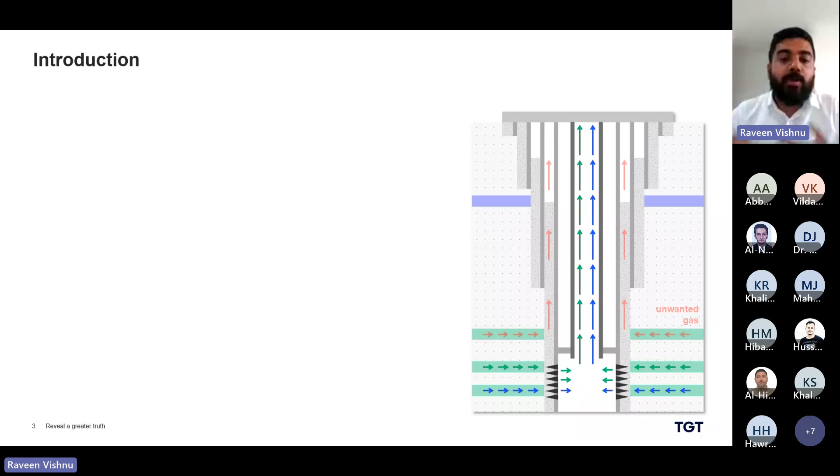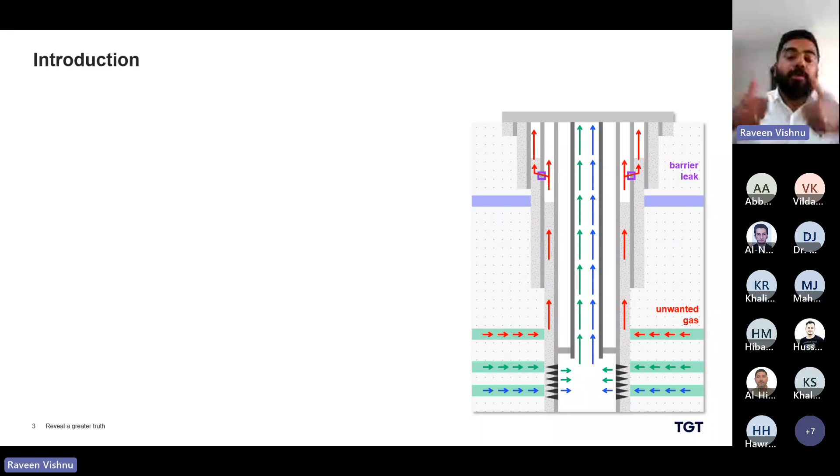Sometimes the seal, which is the cement in this case, is not sealing properly and is leaking, and the unwanted gas flows through the poor cement and goes all the way, which creates a sustained casing pressure at the surface. Another problem that can happen is this continuous flow creates a metal loss, which will lead into a hole and create a barrier leak.

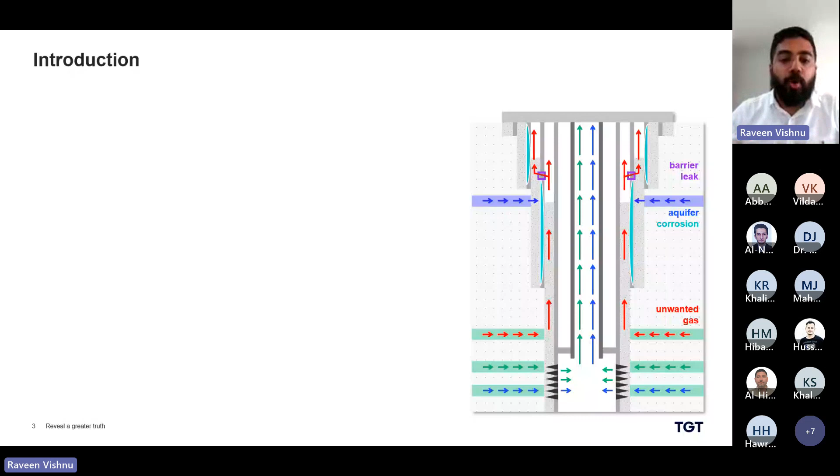Now, aquifers, which are usually in the shallow layers or probably even near the perforations, have corrosive properties, and this creates corrosion in the metal. So because of this unwanted migration, and the life of the well, the metal gets corroded, and this is what we are assessing using tube integrity.

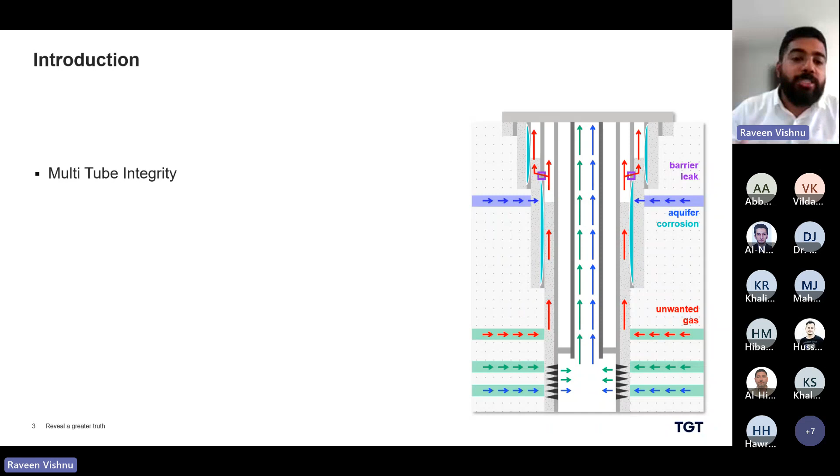This is why we need to do multi-tube integrity, to identify not just the condition of the first barrier, but the second, third barrier, and probably beyond as well. What Pulse, the electromagnetic tool of TGT, provides is individual barrier-by-barrier assessment of multiple tubulars, up to 4 tubulars. The advantage of the technology is that compared to conventional techniques like multi-finger caliper...

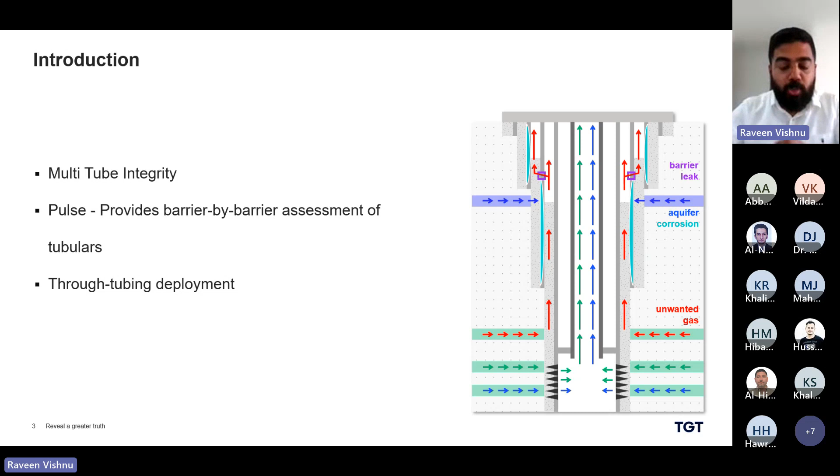If you have to assess the condition of tubing, you run the tool and assess the internal condition of the tubular. If you have to assess the casing, the first casing, you have to literally pull out the tubing to assess the condition of the second barrier, and even then you only assess the internal diameter.

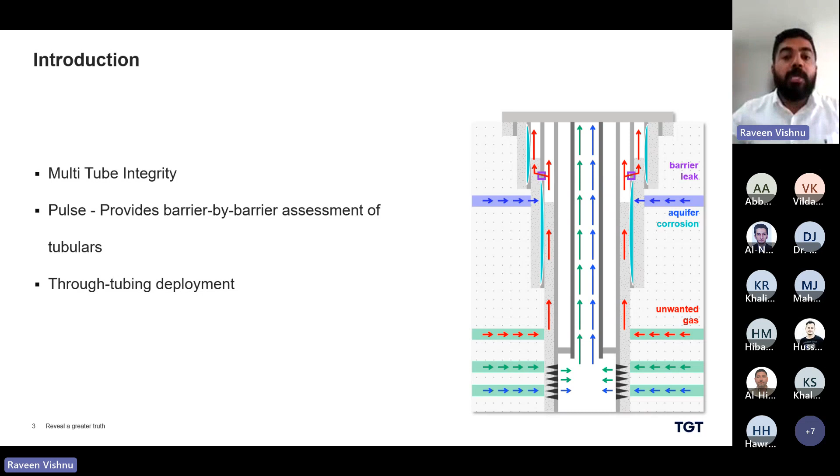The advantage of the electromagnetic pulse technology is that you can deploy the tool through the tubing, and you can assess the condition of not just the tubular but multiple casings beyond. There are multiple added advantages. It's not just the internal diameter you're assessing—since the electromagnetic technology is capable of identifying the condition of the outside wall, you can assess if there is any external metal loss as well. So these are the advantages.

Let me take you through the working principle of the tool. I'm taking Pulse 3 as an example here to explain the theory part. Pulse 3 is the TGT technology which helps us identify the first, second, and third barrier. In Pulse 3, we have three sensors, so it is an active tool.

There are three sensors: a short sensor, a medium sensor, and a long sensor. The name of the sensor is derived from its length. The short sensor is 5 inches, the medium sensor is 13 inches, and the long sensor is 19 inches. Based on the length is the scanning radius of the tool. The short sensor mostly scans the first barrier, the medium sensor scans the first and second, and the long sensor scans the first, second, and third barrier.

Inside each sensor there is a generator and a receiving coil. The generating coil magnetizes the metal around it, and the receiver coil sees how the decay of this electromagnetic effect is; we assess the decay to identify the metal condition. Let me take you to the principle—let's look at a typical well scenario.

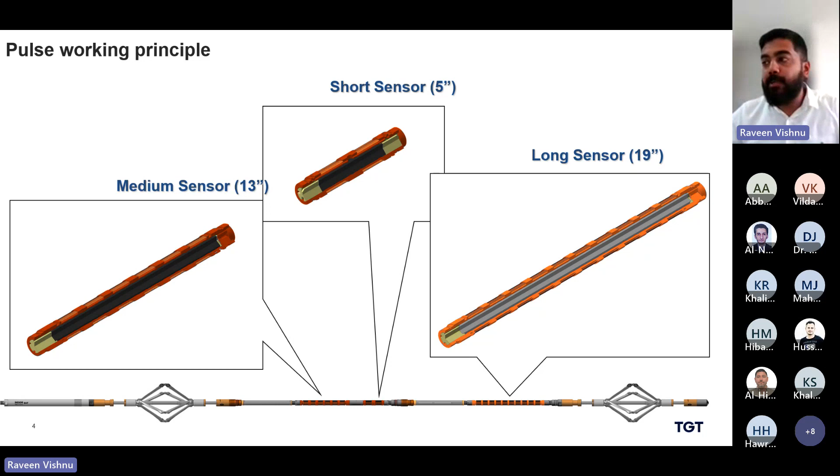We have the tool inside the well. Imagine this is the first barrier, this is the second barrier, and this is the third barrier. As seen before, there are three sensors: the short sensor scans the first tubing, the medium sensor scans the first and second casing, and the long sensor scans the first, second, and third barrier.

As I mentioned, we have a generator and receiving coil. The generator sends a square electromagnetic pulse, and the receiver sees how the decay is with respect to time for this electromagnetic current. What we do is record the data of the decay at multiple time points, and we analyze it.

Sorry, Raveen, sorry to interrupt you. Yes.

Can you change your network or something? Your voice is going back. Maybe if you're on Wi-Fi or 3G. I am on Wi-Fi. Maybe if I switch off my Wi-Fi and switch it on again, I'll be out of the meeting. So you want me to get out and come back? No problem. Let me switch off my Wi-Fi and come back.

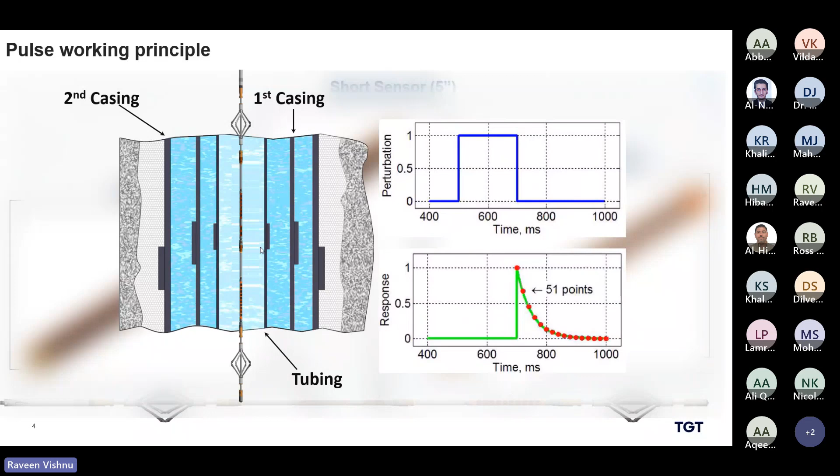As I was mentioning, there is a generator and receiver, and the receiver sees how the decay is with respect to time. You can see the plot here, and we take the data at multiple time points and analyze this data to see how the decay is. Let me show you one example of how the data looks like from one of the sensors, and explain how we can analyze this decay data to understand more about the condition of the metal.

So this, we use the time domain technique. Let me show you how the data looks like. On the y-axis we have amplitude, this is the energy, and this is the time. This is the electromagnetic decay response from the short sensor. If you remember, the short sensor scans the first barrier, right?

So how the data would look like for a thickness which is nominal without any change - this is how the typical data could look like for a situation where there is no change in metal. So this is like a baseline decay, right? If there is more metal, this is in the case of a collar, because across the collar there are two tubulars connected, meaning there is extra metal. The decay will be much slower compared to the nominal thickness. Why? Because now instead of a single nominal thickness, there is a double collar, a double metal thickness because of the collar, and this makes the decay become slower.

Now, what we are actually looking at in a well using tube integrity is the metal loss, right? And what would happen in the place of a metal loss? Across the metal loss, of course, there will be less metal, and this would lead to a faster decay, as you can see in the red line. So what we are looking at from the decay response is the faster decay, to understand that across this particular depth there is less metal. That's why we have a faster decay compared to a conventional decay. And this is the ultimate principle behind electromagnetic thickness detection.

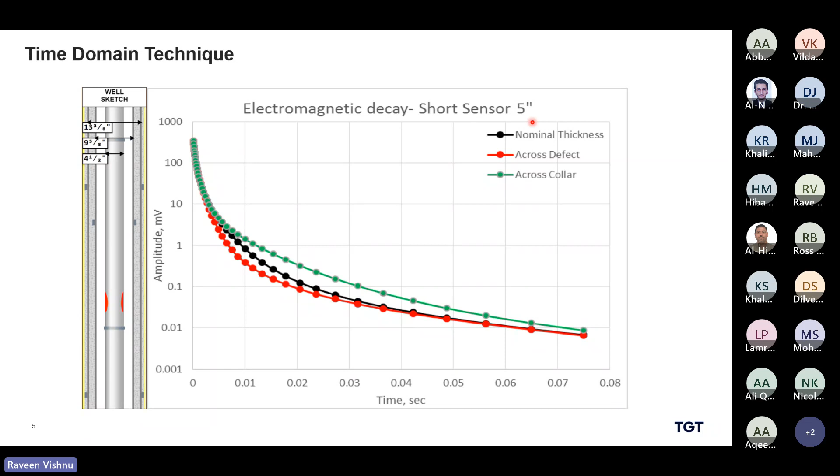Now for the medium sensor, you can see the major decay for the second barrier happens at a later time than the short sensor. It is this principle of the time domain technique that we use to identify the thickness of not just the first barrier, but the second, third barrier, and beyond that in some cases. So you can see that initially across the initial time there is no change, but across the second barrier you can see that across the defect there is a faster decay, and across the collar you can see a slower decay.

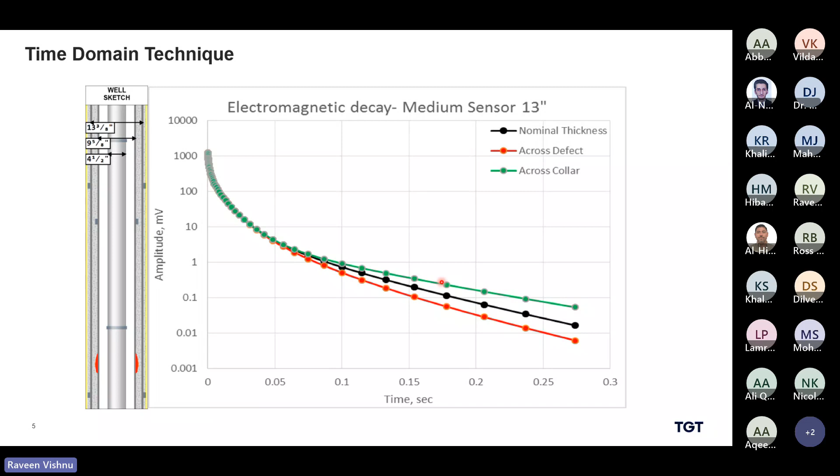Now, this is for the second barrier. Now across the third barrier, if you look at the time, you can see it's a much further later time than the medium sensor and the short sensor. We use this technique to identify the thickness of the third barrier, usually the 13-3/8 casing, right?

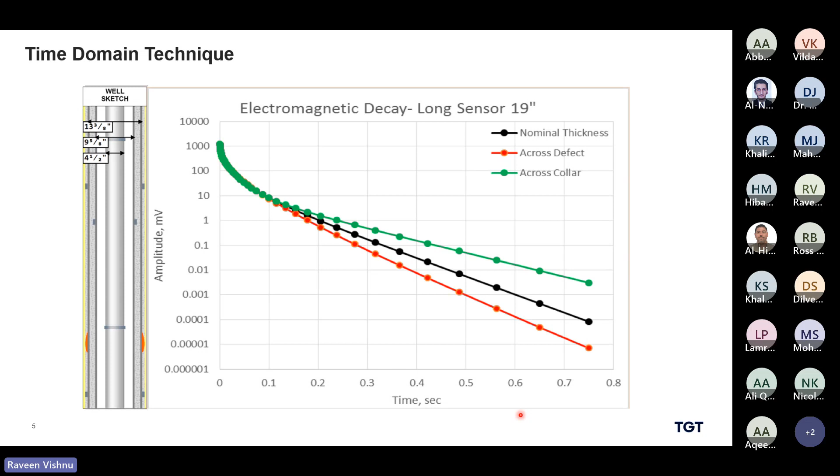So this is the working principle behind electromagnetic thickness detection. We use the electromagnetic decay to understand how much metal is there - if there is more metal, the decay will be slower, if there is less metal, the decay will be faster. And we use Maxwell's equation to convert this electromagnetic decay data into thickness. That's what we finally deliver to the customer.

So let's look at a raw data response, how it looks. This is data from multiple time points, and these three logs represent the data for this individual tubing size. For each tubing size, we have a template of which time channels would represent the decay, and we use that basis study to analyze that particular time channel for interpretation.

Basically, you can see this is the response, and you can see the slower decay across the collar, here. And across the corrosions, for example in this particular case for 9-5/8 casing, you can see a faster decay - this is the second place with the metal loss. This is a simple analysis with magnetic tools.

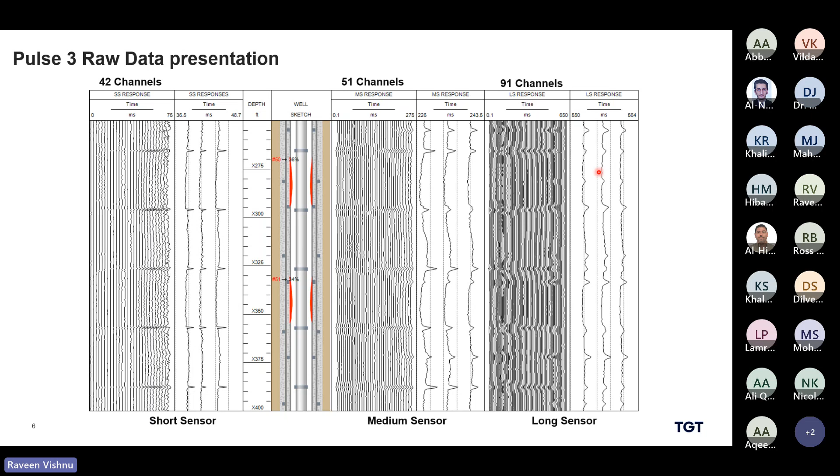So individually, we can analyze the first, second, and third barrier. There are some technologies which will give you a total thickness of multiple tubulars, and you are not able to differentiate where the metal losses are in the first, second, or third barrier. But with time domain technique, the beauty is that we can analyze the situation for the first, second, and third barrier individually. So that's the raw response.

And after solving Maxwell's equation, we can identify the thickness. As an end product, what we can deliver is a joint by joint analysis of the well for each individual barrier. So let me show you the summary table, how it looks like.

In the columns, we have the joint number, what's the top of the joint, the length of each joint, what's the nominal thickness provided, what's the minimum thickness, what's the average metal loss in that particular joint, what's the maximum metal loss, and at what depth the metal loss is maximum. So you can pinpoint for your workovers - okay, at this particular depth, I have the maximum metal loss, so during workover, if I'm going to put a patch or something, I have to care for this exact depth to put the patch.

After discussing with the client, we come up with a class of hazard, because the client knows more deeply about the kind of metal loss expected in the region. So we categorize the metal loss into multiple categories to come up with actionable, quick-look solutions for the client. Above 25%, mostly the clients recognize as a significant class of metal loss, and it's something to be taken care of.

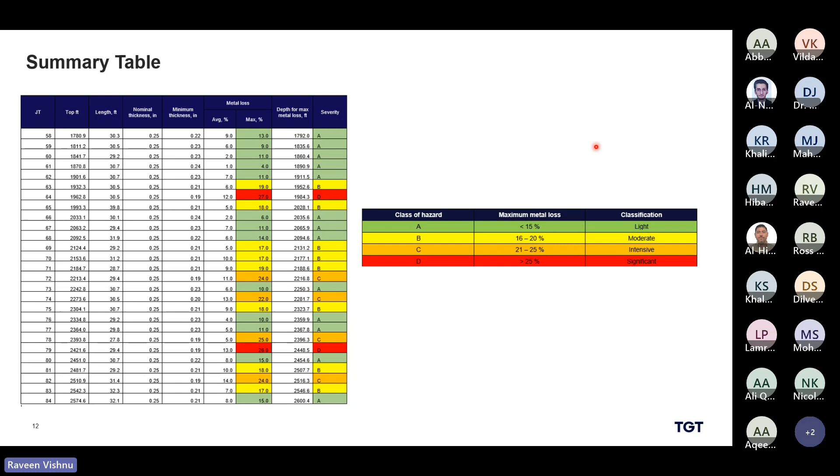So that's the final summary table that's provided. For each individual barrier, we can understand by a quick look which are the joints that have significant metal loss, which are the joints that have light metal loss, and so on.

So for Pulse 3, you can see a tabular column of the specifications of the tool. The maximum temperature rating is 150 degrees Celsius, and pressure rating is 14,500 psi. It has an H2S resistance of up to 30%. And we can identify the accuracy.

The accuracy is different for each barrier - the first barrier is plus or minus 3.5%, 6% for the second, and for the third barrier it's plus or minus 12%. Since the tool is very slim, only 1.65 inches, we can assess almost all tubulars and pass through almost all type restrictions. The conveyance can be done rigorously - slick line, wire line, coil tubing, tractor, and so on.

So these are the specifications of the tool, and we have the latest technology called Pulse 8. So what is the added advantage of Pulse 8? What was the length of this tool?

So it's approximately, I think it comes around 6 feet. If I'm not wrong, it's around 6 feet for Pulse 3. It depends on tool by tool, so it's approximately 6 feet, yeah.

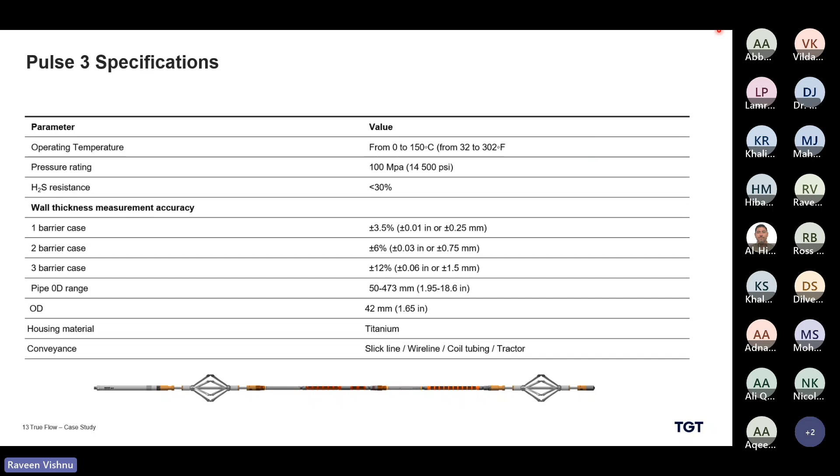Okay, thank you. Right, so we have the latest technology called Pulse 8. Pulse 8 gives you a sectoral understanding of the electromagnetic condition. Basically, Pulse 3 and other electromagnetic technologies give you a circumferential average of the metal loss, but Pulse 8 has 8 electromagnetic sensors throughout, and we can understand sectorally how the metal loss looks for the first barrier.

So it gives you sector-wise how the thickness would look like, and it helps us identify concentrated metal losses in one area of the tubing, or if it's evenly spread across. So it gives us a much clearer understanding about the condition of the well, a sense of how it looks in a 360-degree view of the first barrier condition.

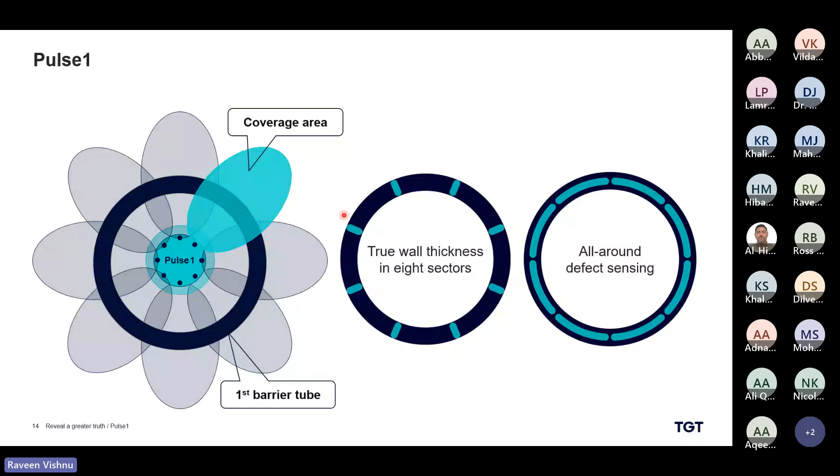The advantage of the conventional technique is that, especially for Pulse 1, it gives a true wall thickness in 8 sectors. With Pulse 3, Pulse 2, and Pulse 4, we can identify what the circumferential average of the metal loss is. We cannot understand individually by sectors, but circumferentially averaged, we can understand the condition. Pulse 1 has the ability for all-around sensing.

Another big added advantage compared to conventional techniques is that these are non-scratch contacts. Multifinger calipers scratch the internal diameter of the tubing walls, but the electromagnetic technology does not have this problem. It's said that this scratching actually exaggerates and creates a catalyst for corrosion to grow faster in some wells.

This is avoided by using electromagnetic technology. Another advantage is that in chrome completions, it can be used, because the dead time of the tool is very low. So in chrome completions also it can be used.

Compared to conventional techniques, if there are any deposits, it's insensitive to such conditions because we are magnetizing the metal and seeing how the decay looks like. It's insensitive to surface deposits, and it helps to understand even if there is a metal loss with deposit on top of it, which could be missed in conventional caliper technique. Using electromagnetic technology, this can be very clearly identified.

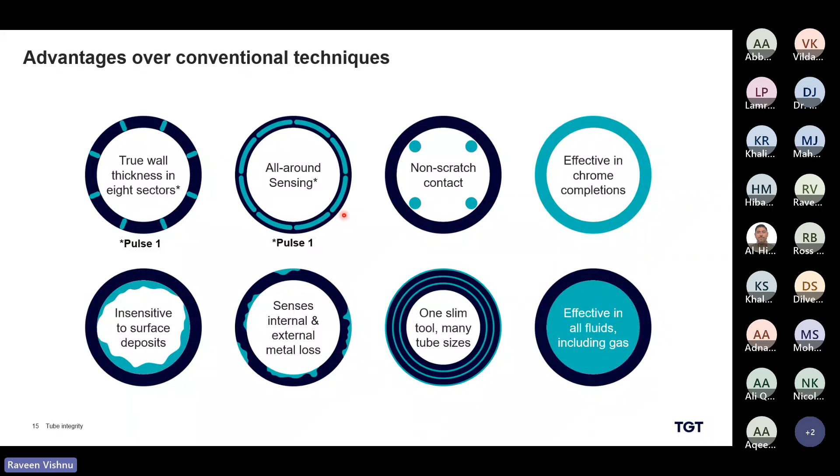The next advantage is that there's no need to pull out the tubing to understand the condition of the 9-5/8 casing. One single tool will be able to identify the condition of multiple barriers. The well need not be shut in, the well can be flowing, and it's not affected by what's inside the tubing. So all these are the advantages of electromagnetic technology over the conventional techniques available.

Let me show you, after explaining the principle, how we capture the data to get these results. It's very simple, the data capturing method.

We prefer to record the data during the up pass, with a stable running speed. We run and hold at high speed, then go up recording the data at a stable speed ranging from 12 to 18 feet per minute, because the sensitivity depends on the speed we run. Slower speeds give better, more reliable data and better sensitivity. So it's a very simple technique: we run and hold at high speed, then pull out of the hole recording data.

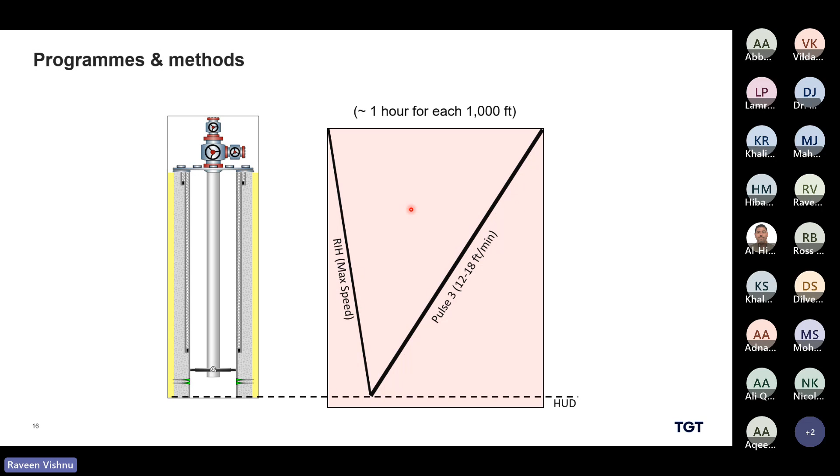Let me show you some case studies and explain some of the added advantages of the technology in real world scenarios. The first case is one in which we identified through-hole corrosion in one of the wells, and this is actually an SPE paper as well, written with KOC. We can see the SPE paper number here.

From left to right, we have the depth panel, and this is called the delta panel. I showed you the raw responses, and the delta panel helps us visualize the raw responses in a different way, helping quickly identify the collars and the corrosions. Mathematically, we're averaging the raw responses and coloring based on the average. If the decay is much lower, we give it a blue color, which relates to the collars of the tubing.

Here, 1, 2, 3, and 4 are the collars of the tubing. If the decay is much faster, we give it a red or brown color. Here you can see it has identified a brown color, which indicates there's a metal loss, and we have calculated the exact metal loss in the tubing.

It's calculated to be around 30%. And this is the thickness of 3.5-inch tubing.

Here we have the far delta calculated from the long sensor, and here you can see the similar metal loss identified. So in the delta panel, we have the short sensor and the medium sensor, and since the medium sensor scans not just the first barrier but also the second barrier, we can see the metal loss in the first barrier even in the medium sensor. This is why you can see the red color in the far delta panel as well.

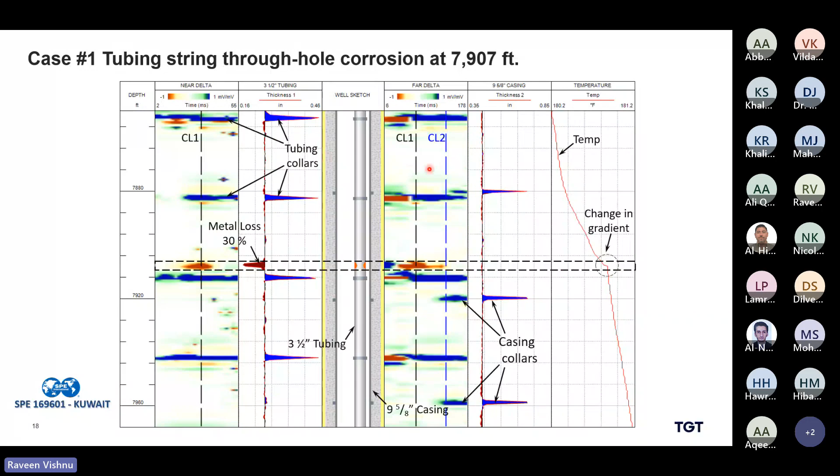So for this particular case, we pulled out the tubing and found out that there is actually a hole inside the tubing, and it was very important for the client to know this information. We wrote an SPE paper about this particular case, which was a very successful case for KOC.

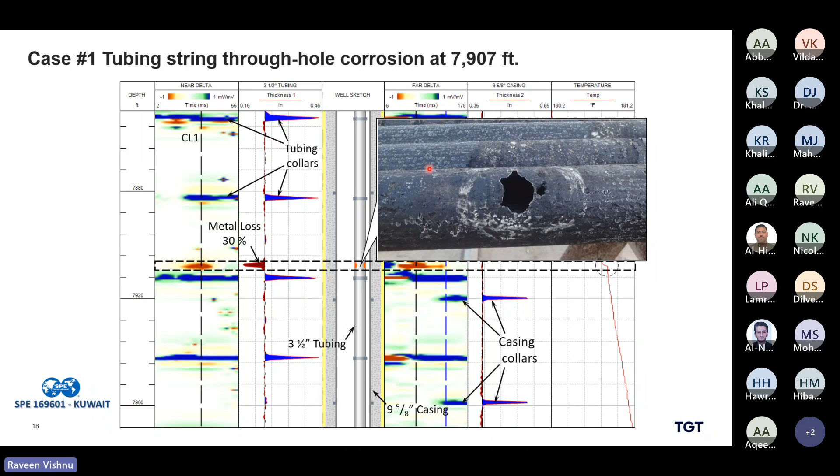Moving on to case study 2, this is another very interesting case. Let me tell you the story. The client had an issue with pump overheating. The well was a producer with an ESP pump, and the pump was getting overheated. The client was interested to know why the pump was overheating and what the reason was.

It was decided to run a survey because they suspected a problem with the tubing. They believed there was a hole in the tubing creating a kind of recirculation, and they wanted to confirm this theory that there was a recirculation causing the pump to overheat. So TGT was asked to run not just our electromagnetic survey, but our noise survey as well. We ran two separate passes: our electromagnetic survey, and temperature and noise, to confirm the theory of the tubing leak and to understand exactly where the tubing leak was and what could have caused it.

From left to right, we have the depth panel. This is the thickness built from the short sensor for the 3.5 inch. You can see that from 0 to 0.5 is the nominal thickness, and the decrease shows metal loss, with spikes shown as collars. You can see throughout there are multiple huge metal losses identified in the 3.5 inch tubing. In the next column is the thickness for the 9 5/8 casing.

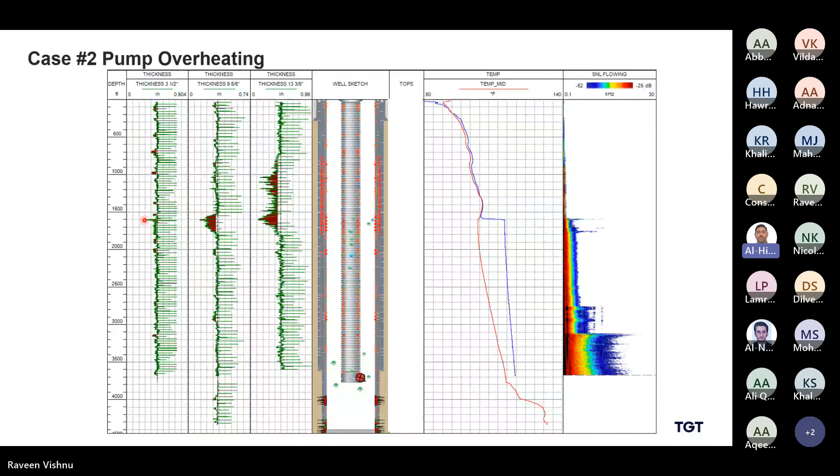Outside, yeah, because of lag. What is the leaking depth? What is the depth? It's around 1,600. Above the ESP, right? Above, yes, above ESP — if you can see my red pointer at 1,600 feet. Actually, your red pointer is disappearing and coming back, so we cannot see it. If you mention the depth, it will be much easier for us. 1,600 feet.

Put your pointer, please. We didn't see your pointer. Our eyes aren't good enough to see where the depth is.

Above the ESP, with the temperature change, yes. Exactly, with the blue temperature change. Okay, correct.

If you look at the 3.5-inch tubing thickness, you can see at that exact depth where the temperature sharply changes, there is a big spike in the metal loss in the 3.5-inch tubing also. Since we had the electromagnetic survey, we knew the full picture and understood that there is something eating the well from outside, and for fixing it long term, we not just have to pull the tubing and change it.

We have to do something about the casing corrosion as well, so probably we have to put a liner all the way up or something. The solutions are multiple, but we understood what exactly is the problem here, the reason for pump overheating. By using multiple technologies, we were able to plan the workover well ahead and in advance, because we knew the full picture, so we could take the right decision so the issue does not repeat itself in the future. Combining multiple technologies provides great value, and this particular case helped us understand the full picture, which helps us solve future problems as well.

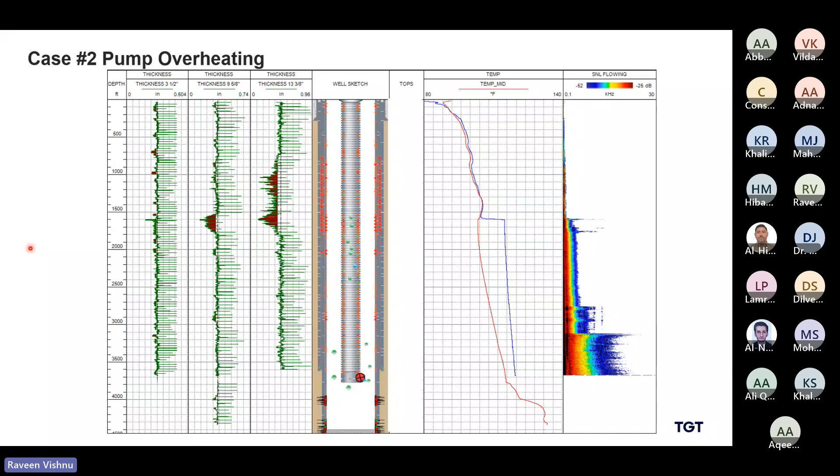Perfect, thank you very much. So I have one more case study, another interesting one. We recommend it to our clients to understand the life cycle of the field, to plan the workovers and so on, which is to do a time-lapse corrosion propagation monitoring.

A lot of clients do this very periodically to understand how the corrosion is progressing with respect to time, to see how corrosive the environment is that we're working with, how we can plan the workovers, and which wells are more important for workovers, to understand if further workovers need to be done to increase the life of the well. So this is one case study.

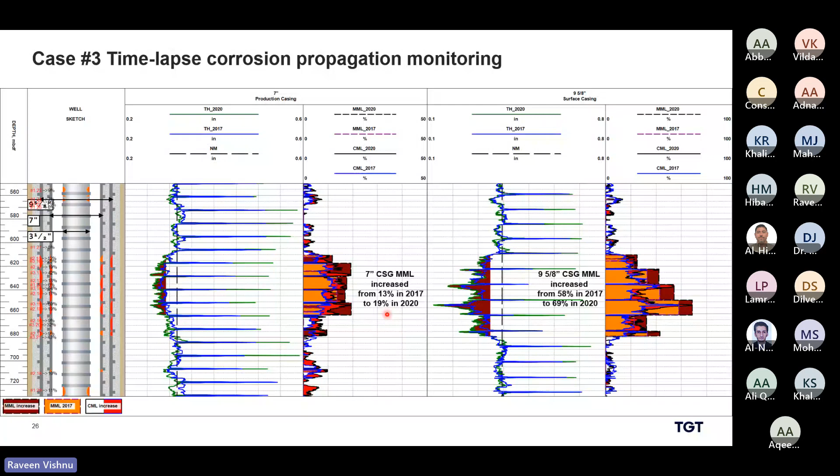So basically, to provide a summary, what electromagnetic survey provides is a metal-by-metal assessment of multiple tubulars through a single tubing deployment. It is independent of deposits in the wellbore, has no scratch contact, and can assess the thickness behind scale. It is independent of the fluid type in the wellbore and senses internal and external metal loss. You can use any conveyance - slick line, wireline, coil tubing - to understand the metal loss. And the best part, you can understand the condition of multiple tubulars with a single run.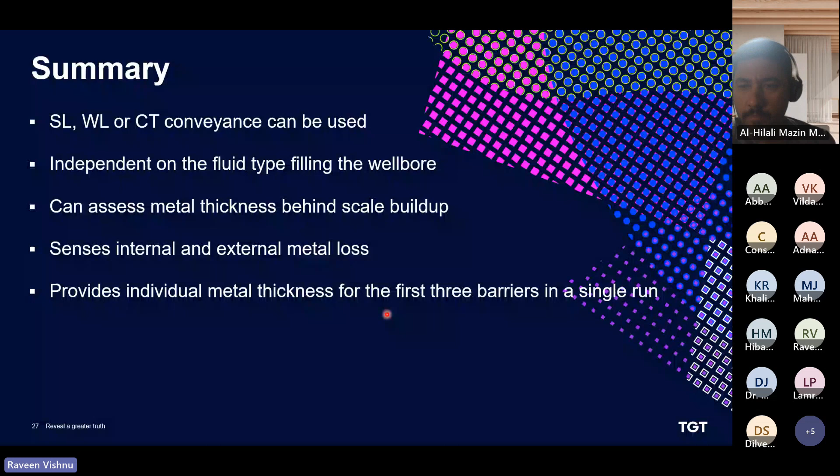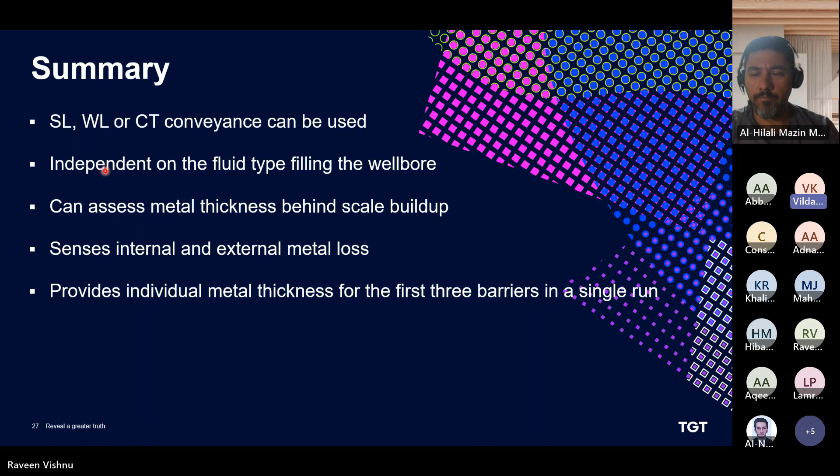I just want to add a few words about some additional applications. It's not major or general, but it might help operators. One additional application: when planning a sidetrack and you don't know the position of the collars of the second and third barrier, running technologies like Pulse 2 lets you identify the collars of the second and third barrier of your casing, so you can plan your sidetrack accordingly.

Another application comes to mind - we did a job in Norway, if I'm not mistaken. The purpose was to identify the position of centralizers in a 20-inch casing. We did the job and prepared an SPE paper on it. We saved the client a lot of money since it was an offshore operation, considering the cost of equipment and crew - a big saving for them. So, two more additional applications for this.